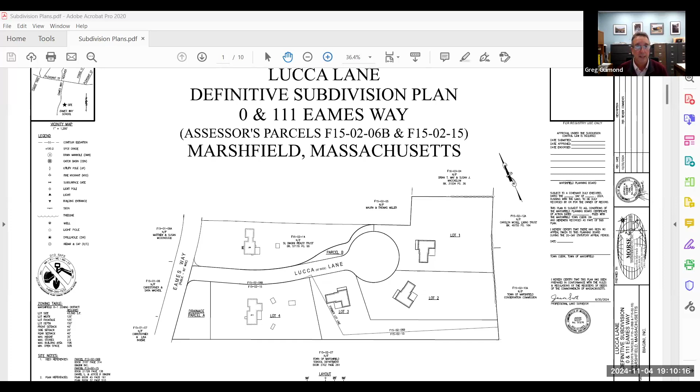Yeah, I mean, thanks Greg. I appreciate the 20 feet. I mean, 20 feet is not a whole lot, obviously. It's still a road in our backyard. You can put as much vegetation there.

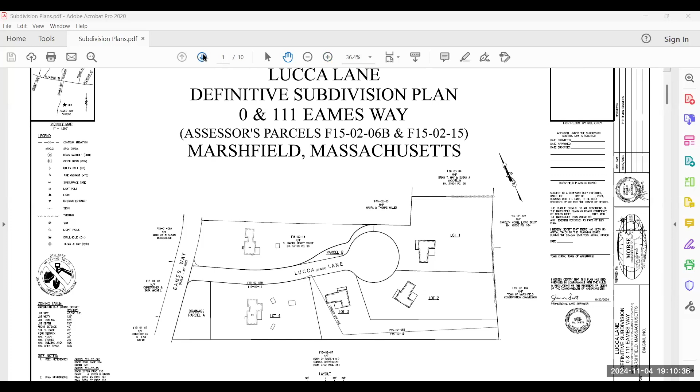It's still right there. I didn't necessarily mean—I think I saw these plans, my first reaction was typing an email to Greg, so I didn't take like the 20-second rule or anything. And I understand the cul-de-sac, it's enormous, it's twice the size of that house. That's just the thing here that just really doesn't make much sense.

And I've looked at the waivers and I understand the property line that was drawn, and obviously that's how this cul-de-sac is trying to go in. That property line was drawn, I think it was 2001. Our house is 40 years old, it was there when this was drawn.

I just really don't understand the massive enormity of the cul-de-sac, and still don't get the placement when there's three other houses on that property. If you want to shift up, shift down a little bit—the real reason is the slope of that property. Everything's getting jammed up on the flat part of the property, which happens to be right near our house. So, you know, it is what it is.

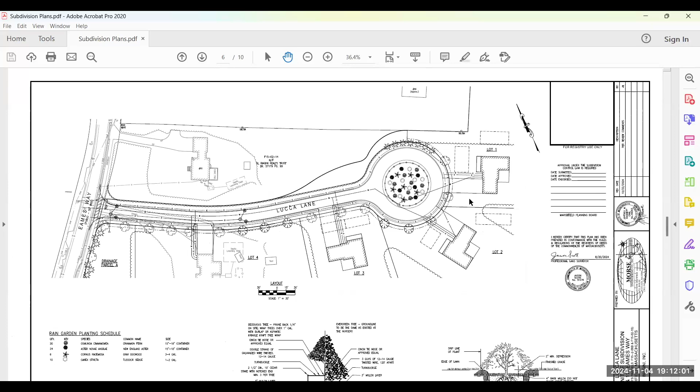I was hoping for a little bit more. 20 feet—there's kids at Marshfield High School that can long jump 20 feet. And I'll leave it at that.

All right, thank you for the comments. Does the board have any questions right now, or do we want to go to the waiver request? All right, seeing none. Greg Gumond, can you bring up the waiver request so we can review those?

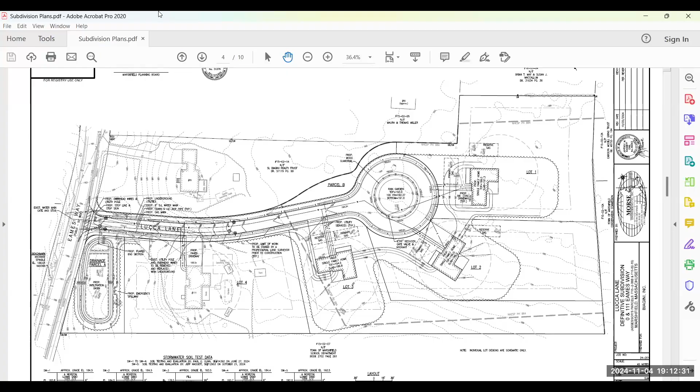Sure, bear with me one sec while I get that up. Kids can really jump 20 feet like that? Wow. Let me go to those track and field games.

Okay, so you should have on the screen the waiver request letter that we submitted. Starting with waiver request number 1. This was a request for the layout of the radius at the intersection of Lucca Lane and Eames Way. The proposal on the north side of that intersection is not to provide a property line radius, but to provide an easement for the radius.

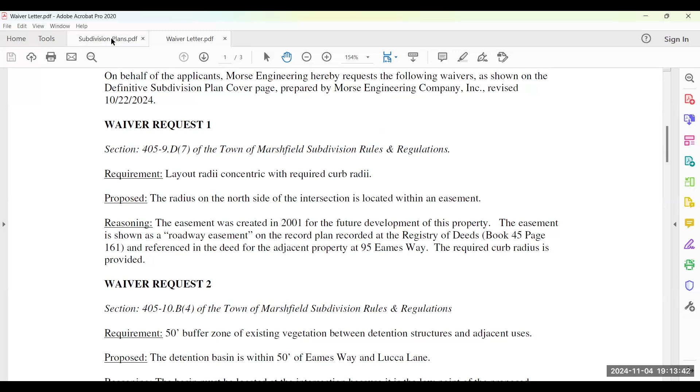This is an easement that's already in existence. It's been recorded at the Registry of Deeds. It was laid out in 2001 when the property lines for this property were established, and it was laid out for the intent of a roadway going in. I think if I switch over to the subdivision plan here, you can see exactly where we mean.

Right here at the intersection of Lucca Lane and Eames Way, this would be an easement to allow for the curb radius. The curbing all fits within that. It doesn't impact number 95 Eames Way whatsoever. That was waiver number 1.

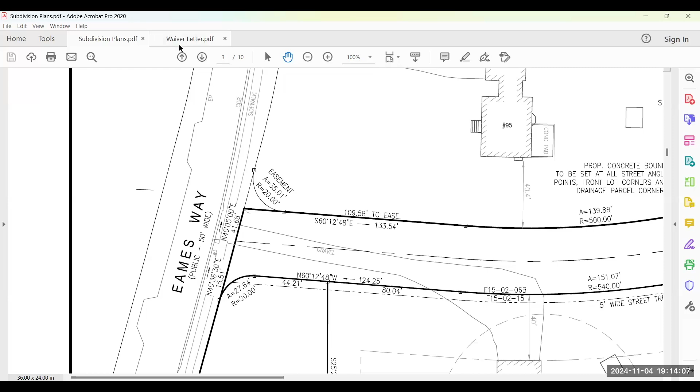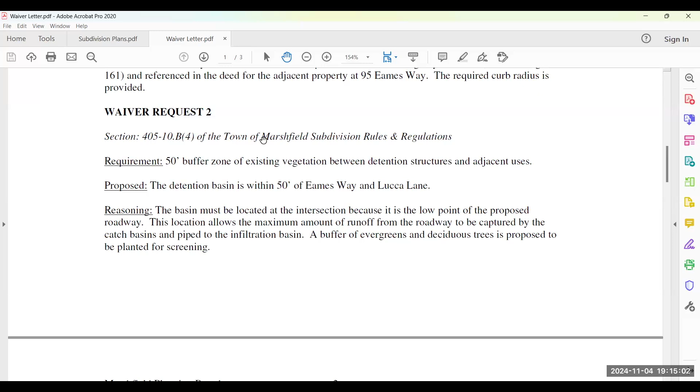Waiver request number 2 was in regards to section 10.B4, which requires a 50-foot buffer zone of existing vegetation between detention basin structures and adjacent land uses. The proposal here was to have the detention basin within 50 feet of the Eames Way and Lucca Lane intersection. This location was chosen because it's the downhill, low point of the site where all stormwater is directed, both with existing and proposed conditions. It's the location that the soils and topography made sense for placing the basin. We are proposing a screening of evergreens and deciduous trees around it to provide screening.

Hey Greg, just real quick, I should have asked the board members on the first waiver and now the second waiver, do we have any issues with those or conversation to have about those? Both make sense to me, but I just want to make sure so we don't have to revisit everything again. We can just go back to the ones that need discussion, if any do.

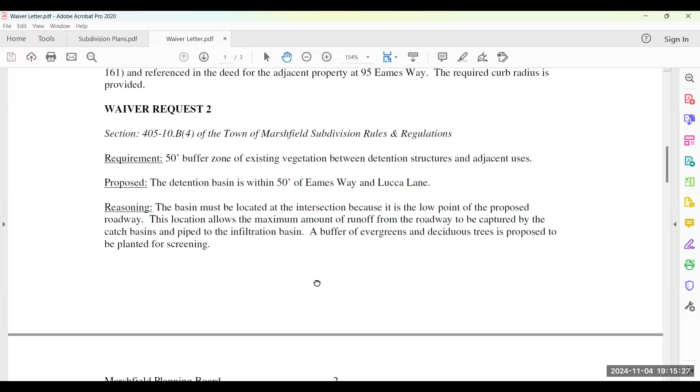All right Greg, sorry to interrupt you. If any of the board members have issues as we go through, just address it at that time, please. Yep, thanks Michael. I don't, but thanks.

Thank you. So waiver request number 3 was with respect to section 10.E2 of the subdivision rules and regs, which requires that all drainage pipes have a minimum of 2.5 feet of cover over them. In our proposal, the drain pipes at the intersection of Lucca Lane and Eames Way have a minimum of 1.8 feet of cover over them. We do specify that those pipes are class 5 reinforced pipes, which are heavy duty pipes made for reduced cover like that scenario. We felt this was necessary because we didn't design the elevation of the Eames Way street. If Eames Way was designed in accordance with today's regulations, it probably would have been higher in elevation, but where we're connecting into it, that's where we don't comply with the cover, down at the bottom of the hill, where we have 1.8 feet of cover over the drainage pipes.

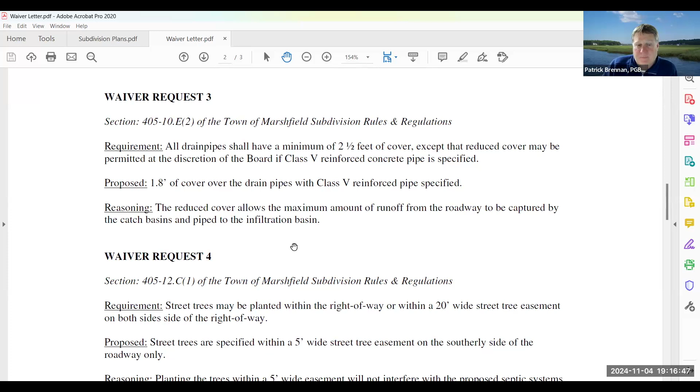Okay Pat, any issue with that at all? No, the class 5 is what they need, and that's what they're proposing. So that's typically what we see with these reduced cover requests. Okay, thank you.

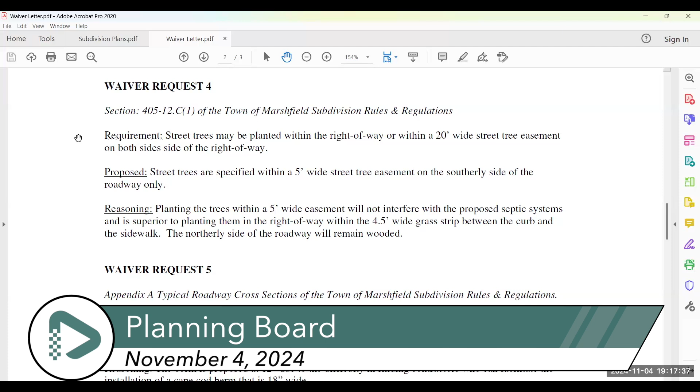Waiver request number 4. The requirement is that street trees may be planted within the right-of-way or within a 20-foot wide street tree easement on both sides of the right-of-way. In our case, we're proposing street trees within a street tree easement that's 5 feet wide along the southerly side of the roadway only. Placing street trees within the right-of-way as specified in your rules and regulations didn't seem like a good layout because of the proximity of the roots and trees to the sidewalk and pavement, so placing the trees on the individual lots seemed appropriate. We have them a couple feet onto the lots within a 5-foot wide street tree easement. The 20-foot wide easement didn't seem necessary if the tree is going to be only 4 feet or so off the back edge of the sidewalk, so we're asking for that waiver.

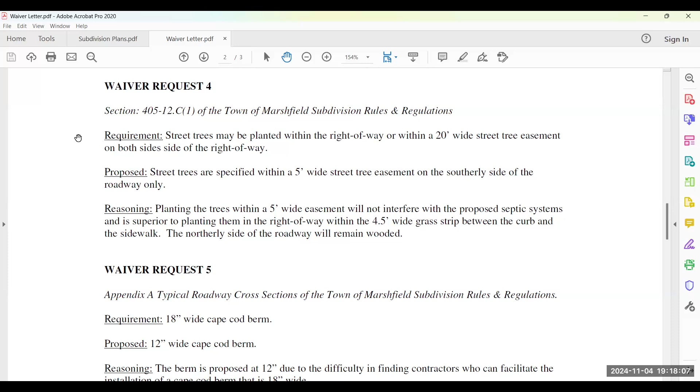Questions on that one? No, don't see any.

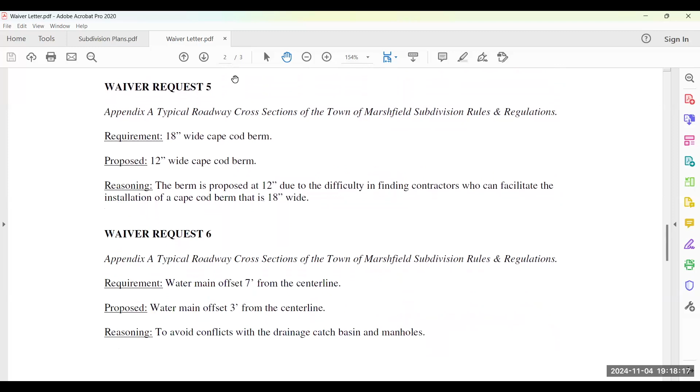Waiver request number 5 is in regards to Appendix A, the typical roadway cross-section, which specifies an 18-inch wide Cape Cod berm to be constructed on either side of the street. As you heard earlier from Mr. Brennan, most pavers cannot construct an 18-inch wide Cape Cod berm, but they are able to construct a 12-inch wide Cape Cod berm. That's our proposal, to do 12-inch Cape Cod berms on either side. We would take the additional pavement width and add it to the travel lanes so that the overall width of the street from side to side remains exactly per your rules and regulations. It's just that the Cape Cod berm would be a 12-inch berm instead of an 18-inch berm.

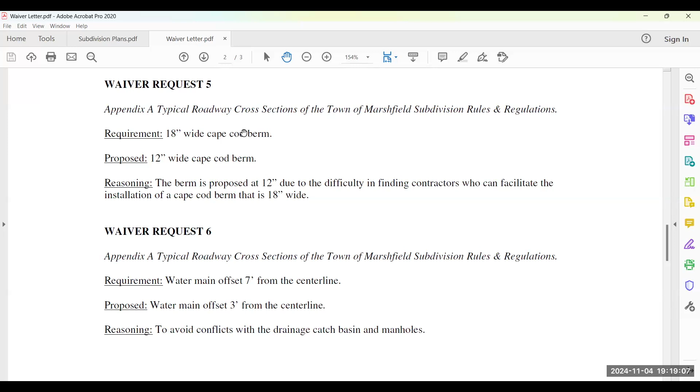Waiver request number 6 is again with respect to your Appendix A typical roadway cross-section. The requirement shows that water mains are to be constructed 7 feet off the center line of the street. The problem is that the water line would then have to go through all of the drainage along the edge of the street, going through the catch basins. We've proposed to offset the water main 3 feet from the center line, so the water main pipe will not intercept any of the catch basins. It's located under the pavement. There are no conflicts. Any questions on that?

No, we don't see any, Greg.

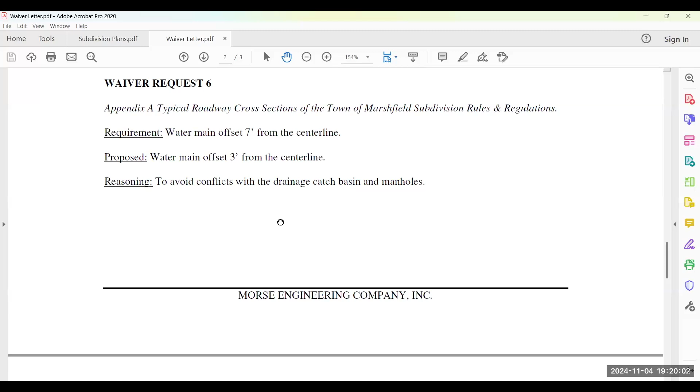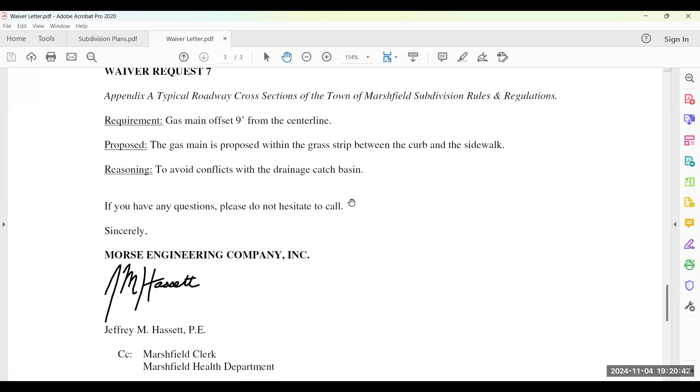Request number 7 is also with respect to Appendix A, the typical roadway cross-section. Your roadway cross-section shows a gas main 9 feet from the center line. For the same reason, 9 feet from the center line conflicts with the drainage and catch basin piping in the street. The proposal here is to put the gas main under the grass strip between the curb and sidewalk. It would prevent conflicts and allow it to be excavated or worked on if it ever needed to be, without going into the street or pavement. Okay, thank you, Greg. Thank you.

Greg, my only comment, I don't have any issue with any of the waiver requests, but number 4 about the trees, I think that's been a common issue that we think we might need to change at some point, so the roots of those trees aren't messing up the sidewalks in other cases, as they have in other subdivisions in the past. So we might consider a change there.

Yeah, we probably would need more than the 5 feet. We did, Kevin Seelan on Red Gold Farm had put them off the road, I think at least 10 feet. Because the roots do bunch up the curb and the sidewalk, we currently have them shown in between the sidewalk and the street, and we were going to shift them so they're outside, either on the edge of the right of way, depending on how wide the right of way is, or on a tree easement. So the concept of the tree easement, I don't have a problem with.

They are doing additional plantings down on Eames Way along the drainage basin, and additional plantings up by the cul-de-sac, and perhaps fencing or something to screen the Miller property. I see those as a nice balance for the waivers requested.

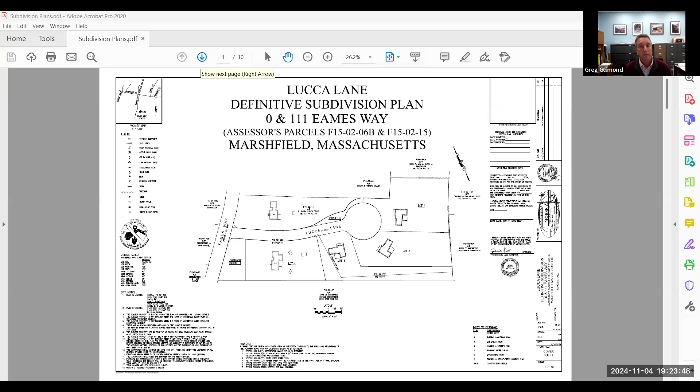Six is the landscaping plan. Yeah. There you go. Great. There we are.

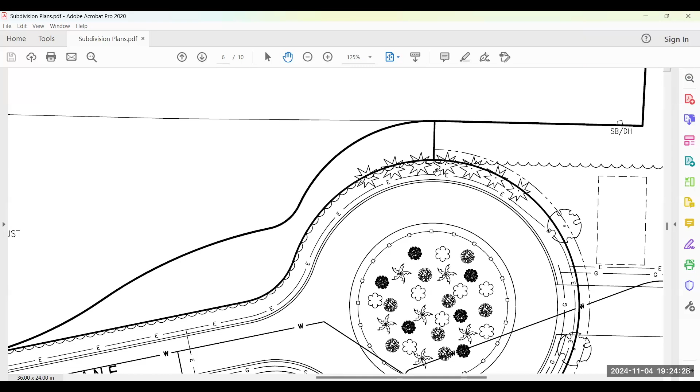From the Miller's property at the north side there to the right of way, the closest point you said was about 20 feet. So this lot line here is a little over 18 feet in length to the right of way line. And then to the actual inside face of curb, that's an additional 10 feet or so, close in terms of where the roadway would be. So from the pavement to their property is in excess of, I would say, 25 to 28 feet. All right, perfect. Yeah, I guess I just wanted to confirm that and note that for everyone here.

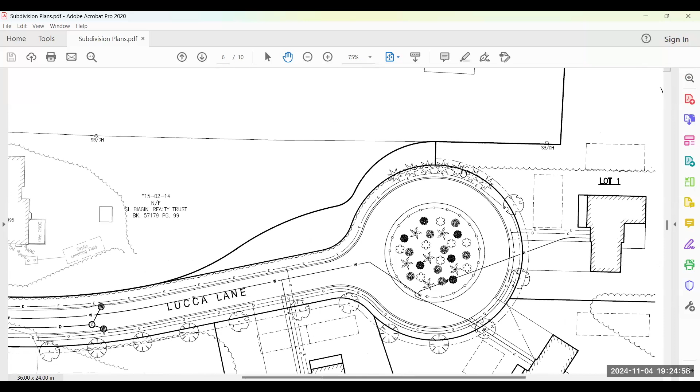Okay, all good. This was the screening that we had proposed there, which, as Mr. Guimond said, we had proposed white pines. We could certainly supplement that or fill it in with more of a green giant arborvitae, deer resistant evergreen, or some additional shrubbery at that location as well. Okay, thank you.

All right, Greg Guimond, you looking to talk? Yes, I had a question for Tom Miller. Tom, if they, in addition to additional plantings, are willing to put some fencing, solid fencing along their property line for a certain amount of distance on each side of where that cul-de-sac centers, does that help?

I mean, it certainly wouldn't hurt, but I think you have to see it to really look at the situation. It's gonna be, this looks like it's the way it's going, so, Tom, does the fence actually help you, or do more plantings look better? Because a fence in the middle of the woods would seem strange to me, it's just a road. That's the tough thing. You can plant as much stuff there, but it's still right there, looking right out our living room.

Well, if it was my house, I understand what you're talking about. I don't think I want to look out and straight up see a fence. Yeah, exactly right. I'm not sure a fence there would be exactly what we'd be looking for, but I think the plantings are really the way to go there. Yes, I agree. I just don't want to lock somebody into a fence, have to put it up and go, oh man, what a terrible looking fence there.

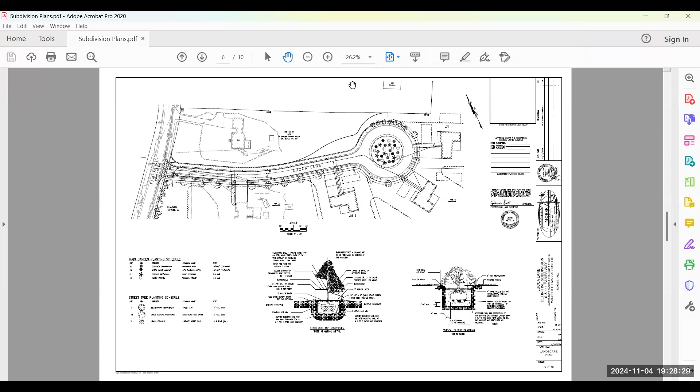Does the board have any issues with any of the waiver requests? No, I'm all set. I don't have any. Katie? No. And Fred, any issues with the waiver requests? No. Okay, Greg Guimond, I think we're good to close this.

Seeing no other questions, is anyone else from the public here? I just see one other person in on this meeting, but might be for something else. So, seeing no other questions, I'm gonna make a motion to close this meeting. Is there a second? Second, Katie O'Donnell. Close the public hearing. Thank you, Greg.

Katie O'Donnell, aye. Nick Pappastratis, aye. Fred Monaco, aye. Mike Viviano, aye.

Okay, Greg, what's the next steps, just so the public knows? I managed to finish a draft today. I've sent it to the board members to take a look at. It pretty much sets up. I just didn't know what we were gonna do with the final thing about the landscaping in the cul-de-sac. That's the one thing that has not been addressed yet.

The board, as part of its motion, could add more detail if you so choose. And then I will have a decision ready for signature by tomorrow afternoon. Okay, we'll take a look at it when it comes across. All right, thank you, everyone.

Thank you. All right, next we're moving on to, sorry, I don't have it up. No, we don't have anything else really. Board staff report.

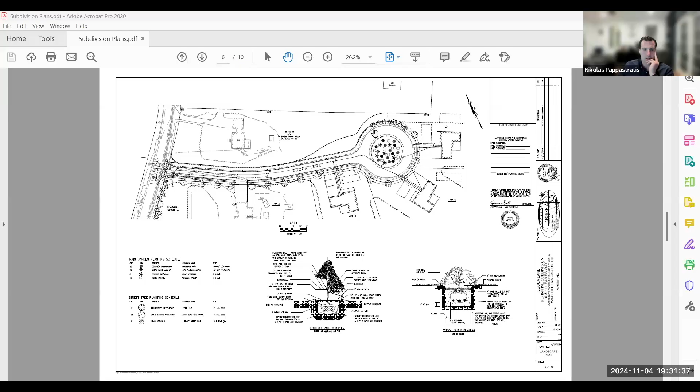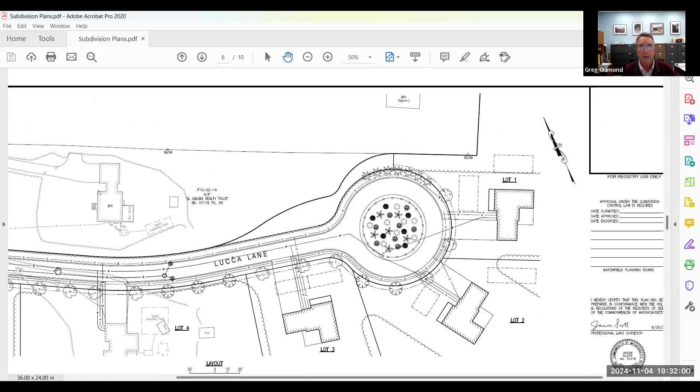It's technically within the right of way, but it does front part of the property. So in that area, it can be planted because it's the right of way. On the other side, it's going to be part of lot 1, and depending on how much they're showing some trees and stuff to remain, I think there's going to be some additional room for plantings in that area.

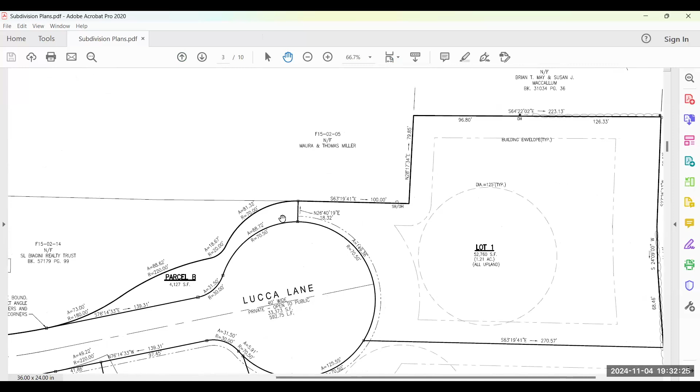So we'll try the motion slightly differently. I'm just going to amend the motion to say we approve the plan as written, and we're requiring up to 100 feet of arborvitaes or some plant to be planted along there, that the applicant can discuss with Pat Brennan what is best — 50 feet on either side of the central line of the cul-de-sac. Does that cover us, Greg?

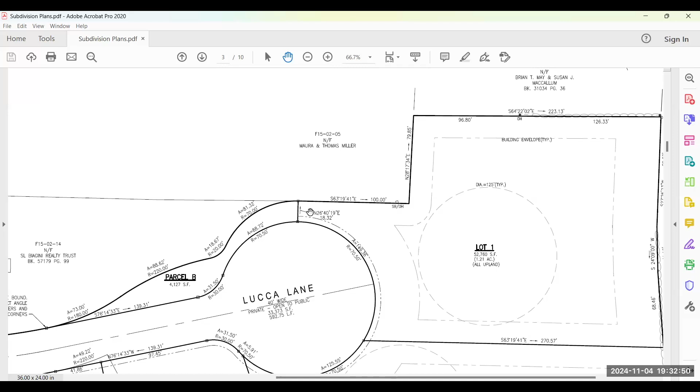I'll get some language that covers everything. The idea is, see that property line that says 18.32? We center on that and plant on either side, a distance of 50 feet, additional evergreen plantings besides the pine trees.

So moved. Is there a second for that? Katie O'Donnell, aye. Thanks, Katie. Nick Pappastratis, aye. Fred Monaco, aye. Mike Viviano, aye. Okay, thank you.

All right, now we'll move on to your report, Greg. For board staff, last Friday I met with a potential developer and his attorney about the possibility of using a combination of Chapter 40B, which is the override of local zoning, and the new Chapter 40Y, which the state calls starter housing.

I've sent you the Chapter 40Y language. Basically, Chapter 40Y is a by-right starter home, so there's a size restriction on the house, 4 units per acre density. I'm not convinced of this yet. Part of my problem is that even at 4 units per acre, it would require enhanced denitrifying systems in the Water Resource Protection District, and one of the properties they're looking at is in the Water Resource Protection District.